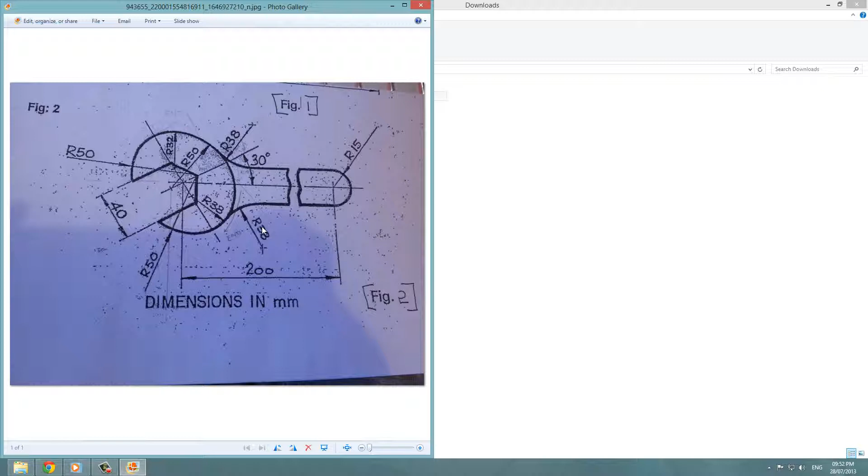Hello, so I will now show you how to construct a basic wrench looking object in AutoCAD. However, for those of you who prefer to draw it on paper, it is your choice. So I will now open a preview of what I did in constructing the wrench. This is a preview of the finished product, but now I will totally take it off and start from scratch.

So the first thing I'll do is construct a regular horizontal line of any length. Next I will construct my 30-degree angle. Next, what I'll do is construct a line perpendicular to this line to represent the imaginary line that you're seeing here. It can be of any length, by the way.

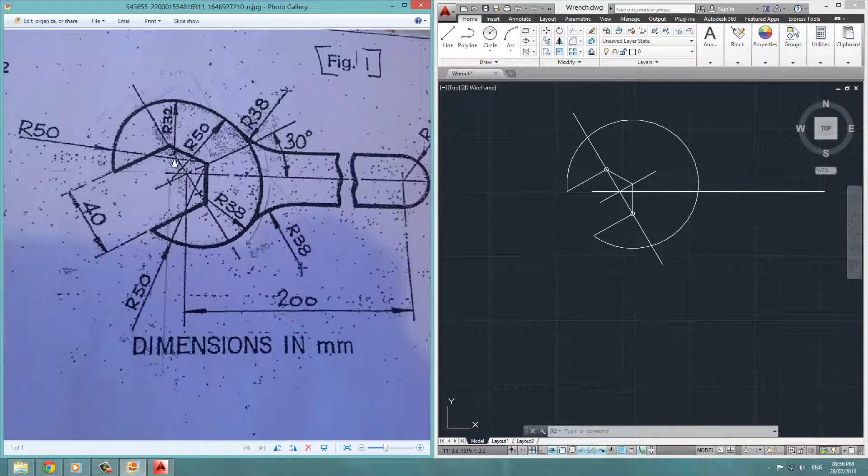Next, since we're assuming again that the distance between this point here and the center, as well as this point here and the center, are the same, we will then achieve that arc by constructing a circle from the center here to this point of intersection, so we can get this point here. And with this point, we will then construct our second 50 millimeter arc. And then we could always trim it. In doing so, we could always trim the first 50 millimeter arc.

And next, this is where the assumptions and fake measurements start. Now, I'm not exactly sure how to achieve the R32 and R38 arcs. So we're just going to assume and make it look like we achieved that through construction. So we're going to start from this point. It can be any point. Once it's on this line, we're going to construct that radius 32 circle, and next we are just going to drag it along this line until it looks as though it's touching 2 points of tangency, the two radius 50 circles or arcs. When that's done, you could always adjust the arc until it touches this arc in particular.

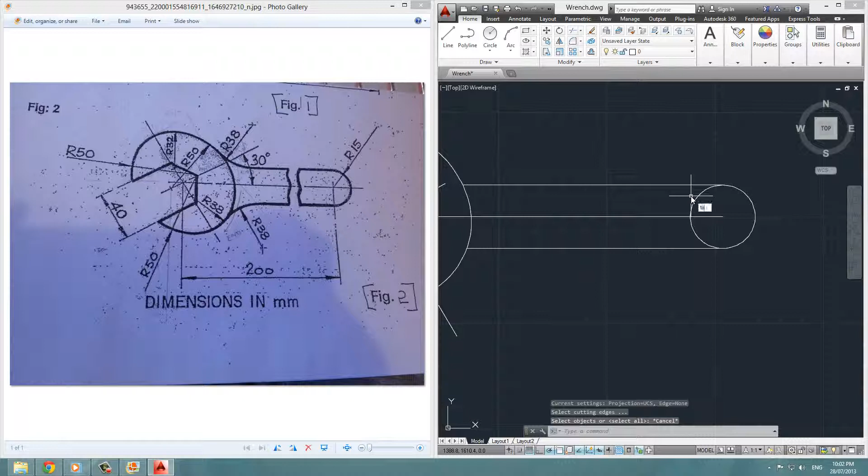We then copy or construct a line that is horizontal or parallel to our original horizontal line until it meets our makeshift ellipse. We can then trim, or those on paper, carefully erase or darken our main outline. In this case, I will trim the unnecessary part of the circle.

Then our final part of faking our measurements to construct this wrench would require us to construct a 38mm circle, and again drag it until it looks as though it touches both the horizontal line and our makeshift ellipse. And we do the same for the other side. So make sure you get it as close to the line and our ellipse as possible. That should do it. And then we can adjust it carefully.

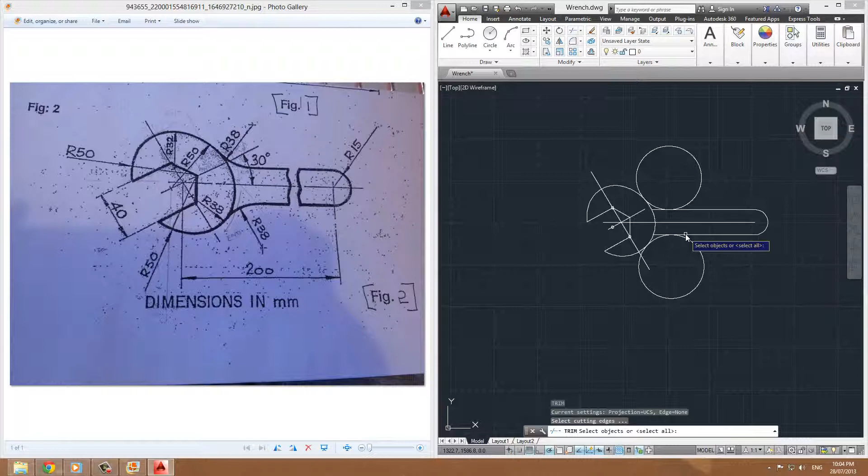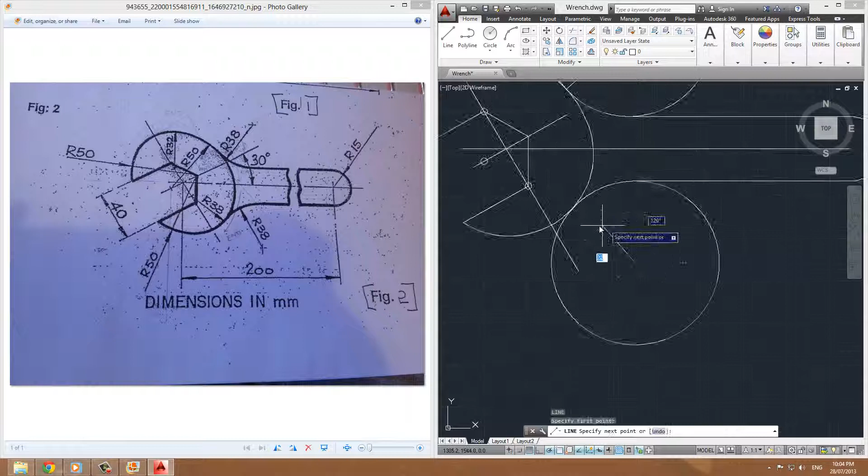Next, all we do is trim, or for those on paper, you darken the main outline. In this case, I will trim the unnecessary curves and line. Of course, since this is a fake measurement, I will have to connect the center of the circle to the edge of it, and then trim. Sorry, forgot this part. And there you have it. When you do that, you're pretty much done.

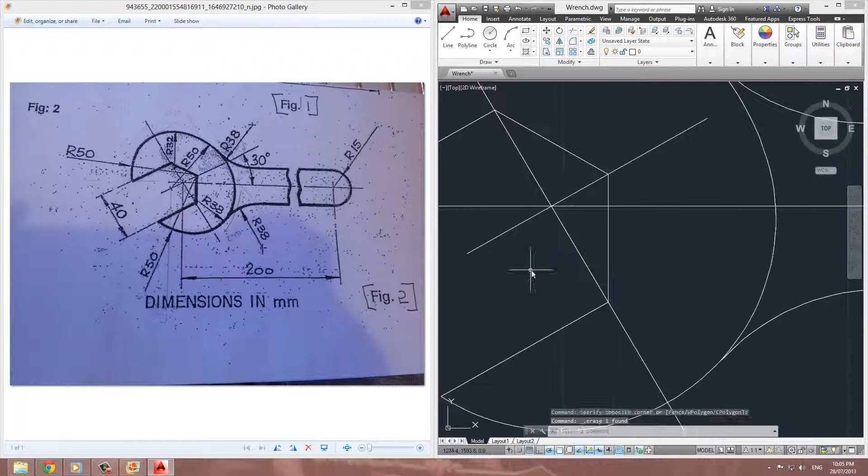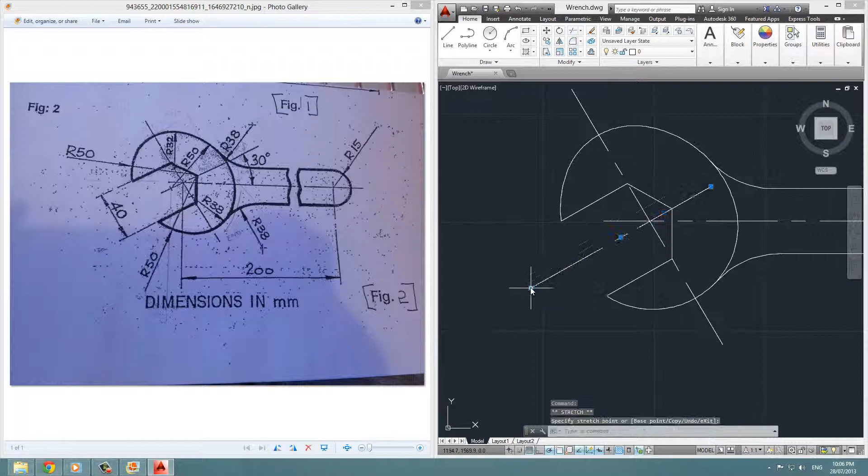It's a bit unfortunate that we had to use some fake measurements there, but that is basically how you construct your ellipse and the outline in general of your wrench. So I hope this has helped those who have been dumbfounded like myself sometimes. Of course, it would be very great if you have accurate measurements on your diagram. If so, then using the blending of arcs method should be quite easy for you to construct your two curves right here and here.

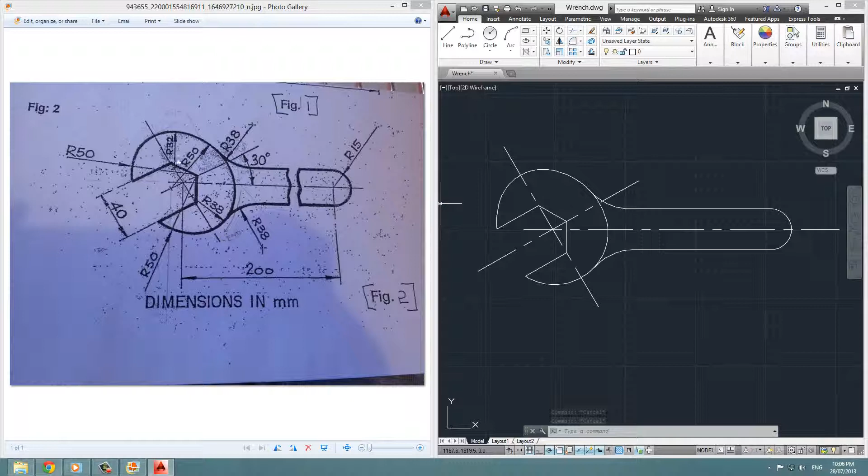And also, I believe there should have been a total length for this imaginary line here, from this point here to this point, so you would know exactly where to get the center of the circle for the R32 and R38 circles.